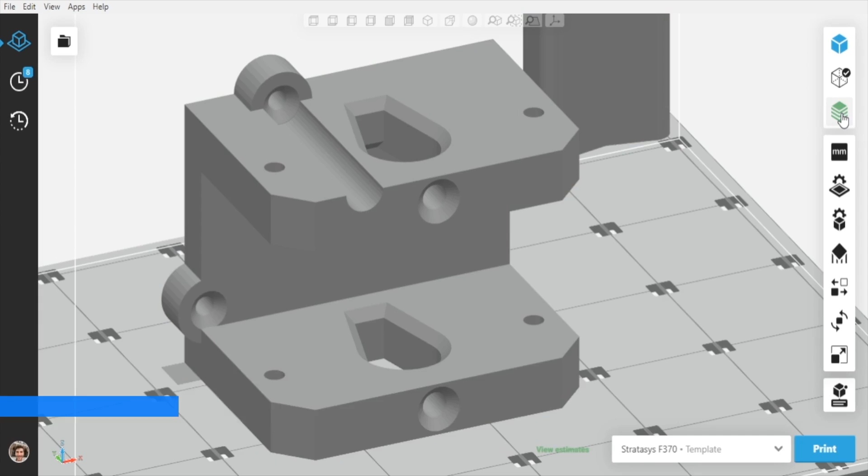In this video tech tip, we're going to be covering how you can save material and reduce time on your Stratasys FDM 3D prints using the Smart Support feature in GrabCAD Print. Sometimes when 3D printing an object, we may have a geometry that would be difficult to capture without support material. If we were to 3D print this object without using any kind of scaffolding, the top would bridge or fall into the gap due to the lack of support material underneath it.

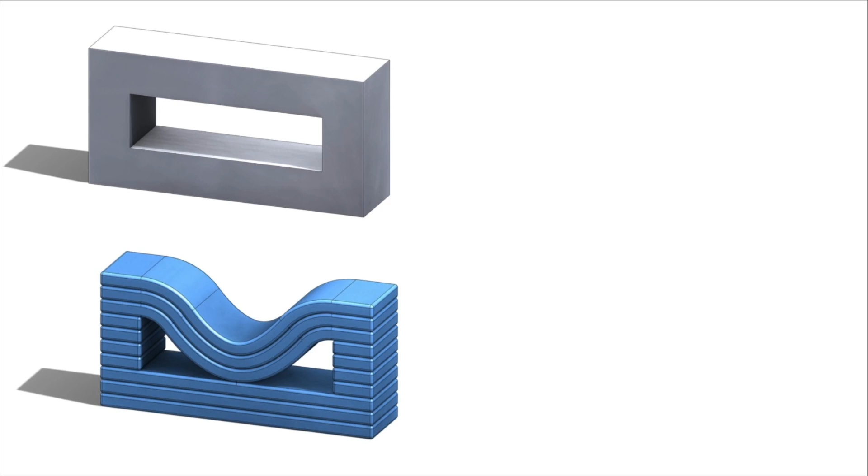However, using Stratasys FDM 3D printers, we're able to create a scaffolding material out of a soluble secondary material, which we can print out and then dissolve away, leaving us with a 3D printed version of our original object. To get a better understanding of how the support material actually scaffolds the model material, we want to take a look at the support structure. Here we see a typical sparse support structure, and it's made of three distinct components.

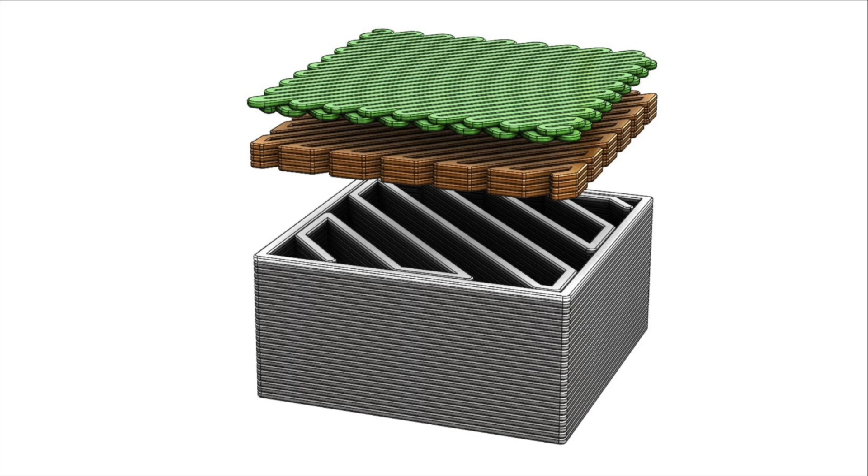The first of which is the interface layer. This is where the model material comes in contact with the support material, and it's typically fairly tightly spaced. This gives the model material a nice flat surface to print on. Next, we have the transition layer. This is where the material starts to open up a little bit and the air gap between the layers becomes a little bit wider. This is to give a nice transition between the interface and the next section, which is called the sparse support structure.

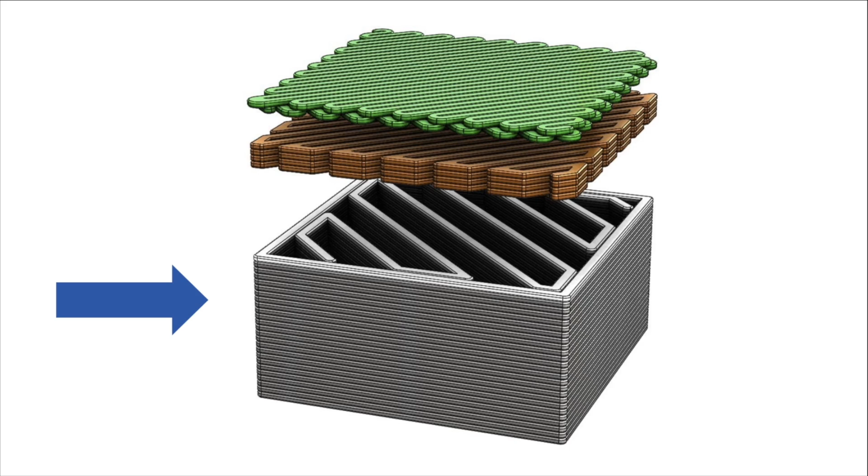Here we have a large air gap, and it's typically printed a good deal faster than the model material. This is because we only need a little bit of volume here to hold up the transition and then the interface layer. As you can see, the shape is monolithic, so the footprint is the same at the bottom as it is on the top.

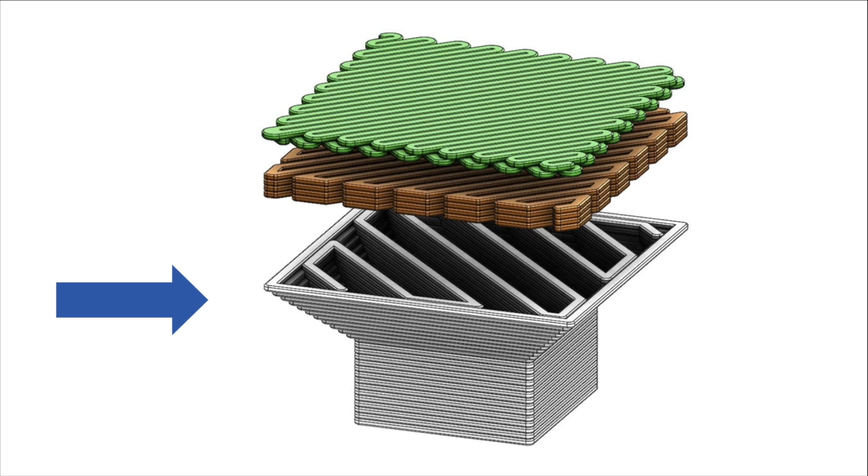In order to help users save material and reduce time, Stratasys FDM 3D printers use what's called a smart support structure. A smart structure is very similar to the sparse structure in that it has three components: the interface, the transition, and then the sparse layers. The primary difference is the smart support structure has a wine glass shape to it, meaning it uses less material as it's building, and it can also print faster due to the decrease in print volume. For printing large objects that require a lot of support, this is a great way to cut down on your overall material usage and speed up your build time.

For this demonstration, we'll be comparing the runtime on a Stratasys F370 using two identical build trays. Both trays have been set up with ABS at 0.010 inch slice height using the standard QSR support. The only difference between these trays is one has been set up for sparse support and the other has been set up for smart. We'll start by looking at the model that was prepared with sparse support, and if we click Show Slice Preview, we can see the support material is one monolithic block, so it prints with a consistent width and size throughout the entire model.

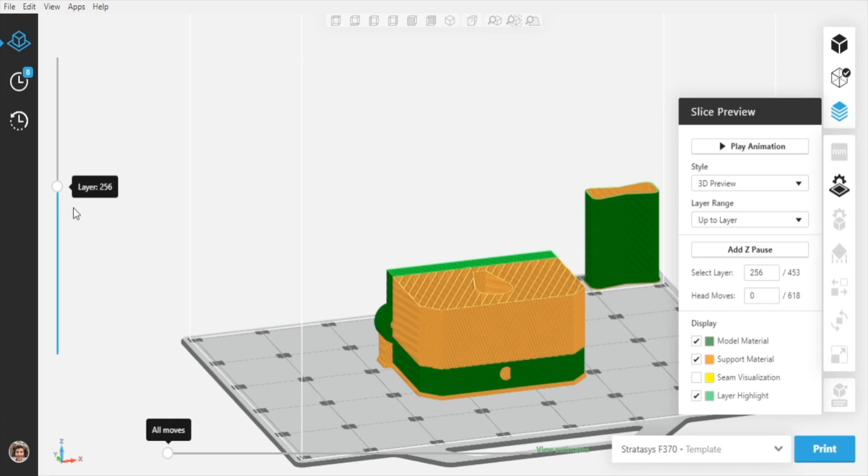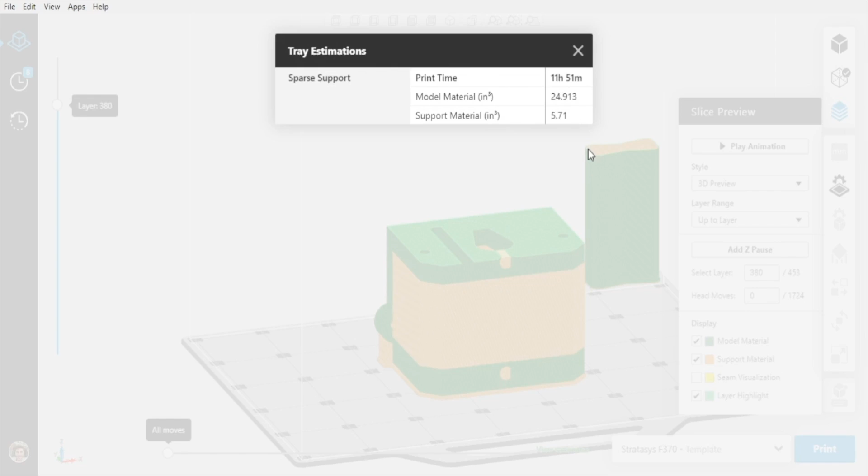For models that have many fine features, it might make sense to print out a larger block of support material to scaffold them, but for this model, we only need to support this top surface of the bracket, which needs to be printed in this orientation for strength. With this in mind, we can click View Estimates to see the print time and support material usage on this model. Taking note of these numbers, we can now go over and switch to our model that was prepared with smart supports for a comparison.

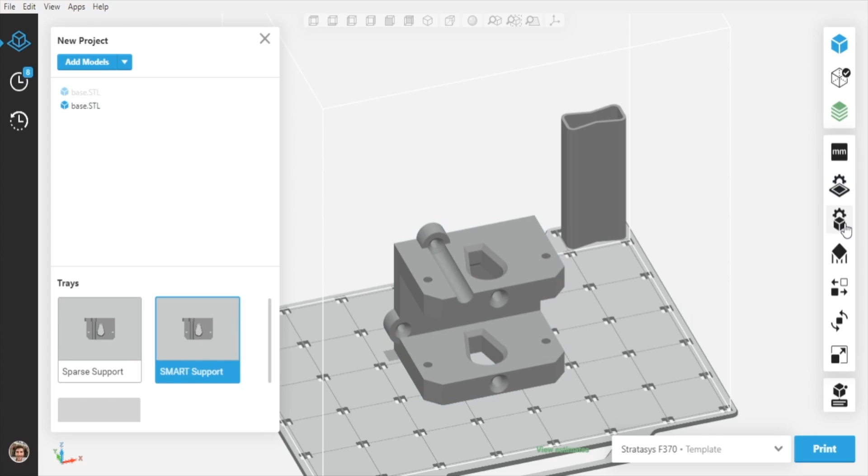If we want to change our support style in GrabCAD Print, all we have to do is click Support Settings, where we can select from a few different options. For this model, I've selected Smart so we can compare it directly against the sparse support. Now that this has been selected, we can click Show Slice Preview, which will show us the toolpath of the model. Now we've switched over to our Smart Support tray, and we can see if we go to Model Settings, we're still using ABS at a 0.010 slice height. The only thing we've changed is the support style on this model has changed from sparse to smart.

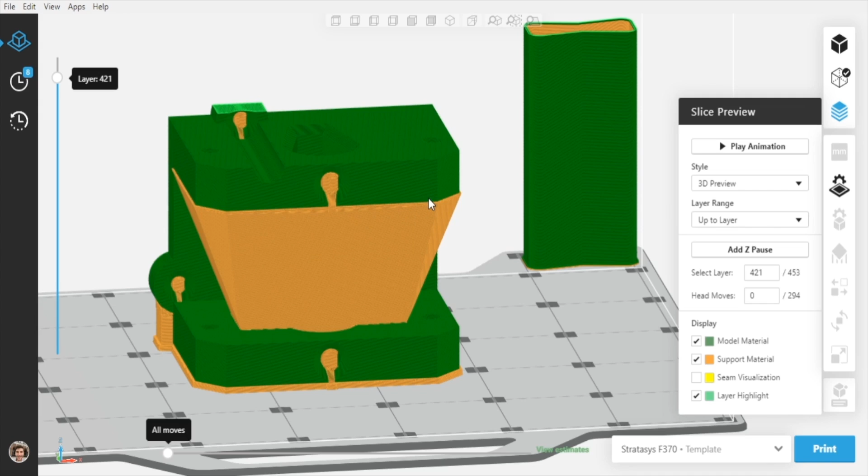From here, we can click the Show Slice Preview button, and we'll see that instead of a large monolithic block of support, we have an upwards tapering block of support. So from here we can tell that this bottom surface is completely scaffolded by the support material. However, the block tapers down, which reduces the overall amount of material used as well as the amount of time it takes to print. And we can see that if we click View Estimates, and we can compare our print time and support material usage with smart support to our print time and support material usage with sparse.

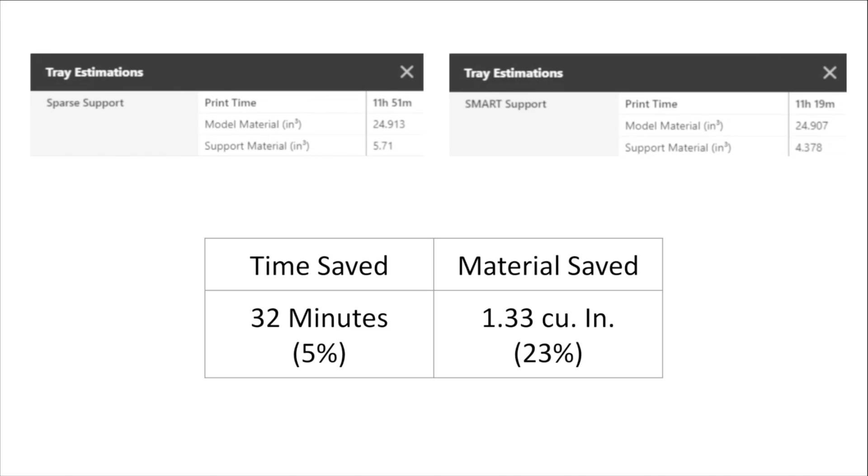Here we can directly compare the sparse and smart support build times. One of the key takeaways here is, in addition to a 23% reduction in support material usage, we also have a 5% reduction in time. That's 32 minutes per part that's not spent printing support material, which can add up if you're printing multiple parts.

Overall, using the Smart Support setting on Stratasys FDM 3D printers is a great way to save material and reduce time on large prints that might require a large amount of support material. For smaller prints, the impact may not be quite as dramatic, but it can certainly add up if you're printing multiples of a part.